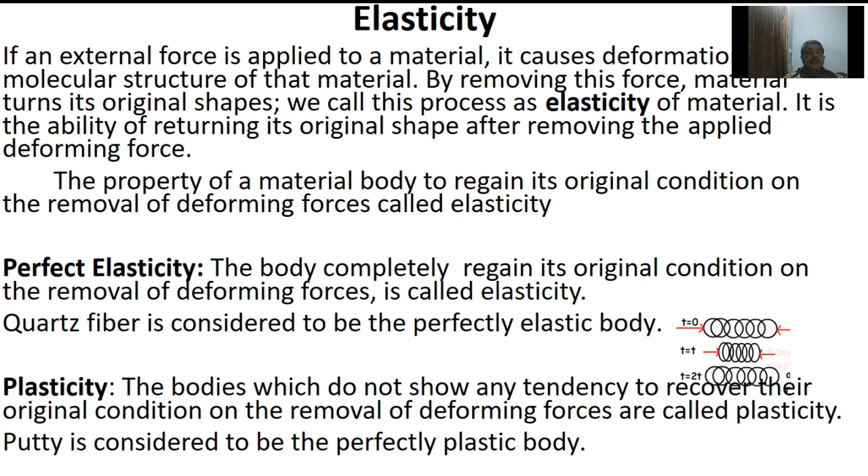Here elasticity measures how difficult it is to stretch. In our day-to-day life, if anybody asks which is more elastic, a rubber or a steel, our answer is rubber. But physics defines elasticity as resistance to change. The greater the resistance to change, the greater is the elasticity of the material, and the faster it comes back to original shape after the deforming force is removed. In the physics sense, steel is more elastic than rubber.

Next, we'll move on to stress. A body is in equilibrium under the influence of intermolecular force, but when deforming forces are applied to it, there is relative displacement of particles, and that gives rise to an internal force of reaction which tends to oppose and balance the deforming force. If this opposite force is uniform, it is a distributed force like fluid pressure and is measured in the same manner as force per unit area.

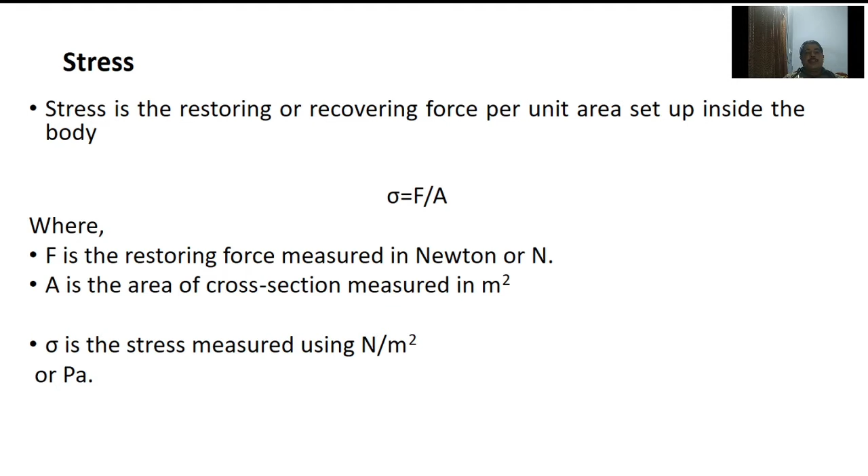This restoring force per unit area set up inside the body is what we call stress. It is given by sigma = F/A, where F is the restoring force and A is the area of cross section. SI unit of stress is Newton per meter square or Pascal.

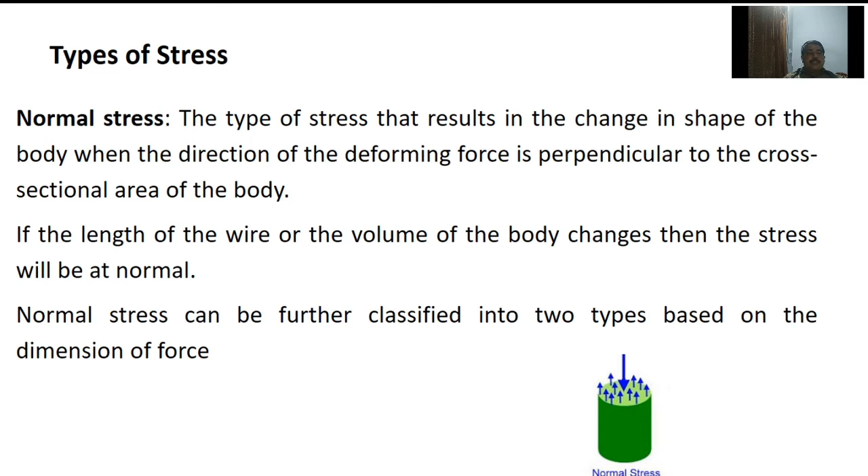Next, we'll move on to types of stress. First one is the normal stress. When force acts perpendicular to the surface of an object, it is called normal stress. When normal stress acts on the body, there is a change in the length or volume of the body. Normal stress can be further classified into two types based on the dimension of force: longitudinal stress and bulk stress.

We know that when normal stress is applied on the body, there is a change in length or volume of the body. If there is a change in length of the body, it is called longitudinal stress. When the deforming force acts in all dimensions resulting in a change in volume, it is called bulk stress.

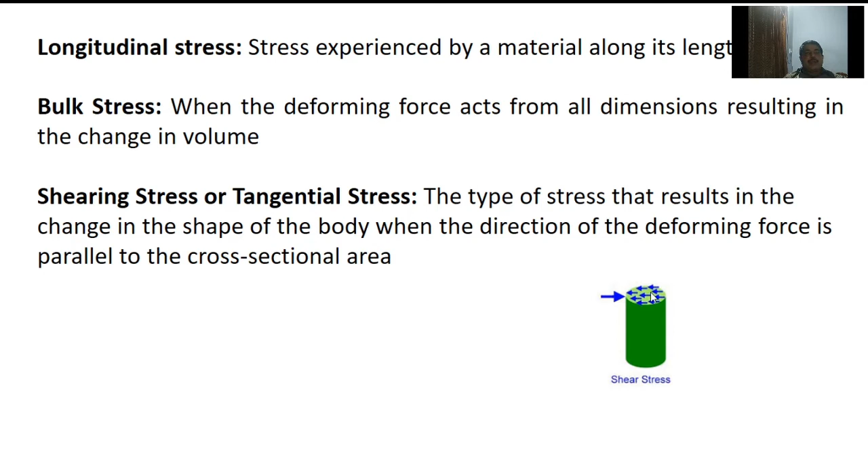Next, we will move on to shearing stress or tangential stress. In this type of stress, the force acts parallel to the surface of an object. When tangential stress acts on the body, there is a change in the shape of the body.

Next, we'll move on to strain. We know that when a deforming force is applied on a body, there is a change in length, volume, or shape of the body. Then we say that the body is under strain.

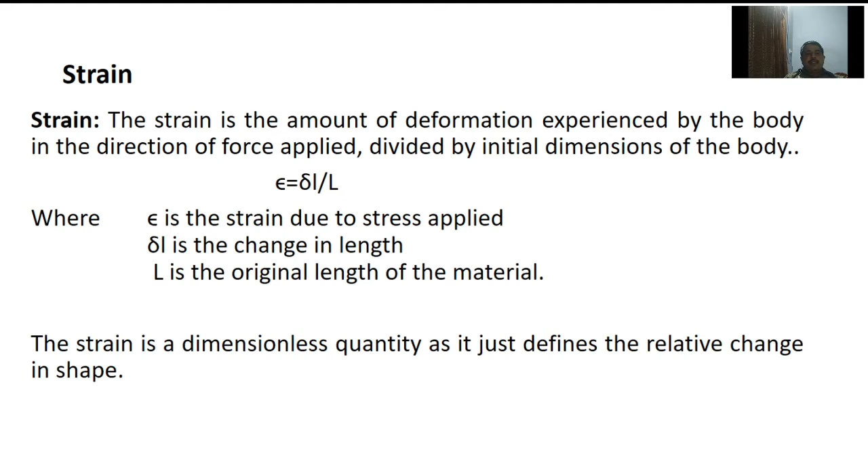Strain is the amount of deformation experienced by the body in the direction of the force applied divided by the initial dimension of the body. That is, strain is equal to change in dimension by original dimension, and it is given by ε = ΔL/L, where ΔL is change in length and capital L is the original length of the material. Strain is a dimensionless quantity as it just defines the relative change in shape.

Next, we will move on to Hooke's law. Hooke's law is a fundamental law of elasticity, proposed by Robert Hooke in the year 1679. It states that within the elastic limit, stress is directly proportional to strain. Therefore, stress is equal to E into strain, or E is equal to stress by strain, where E is the proportionality constant, and it is called the modulus of elasticity. The unit and dimension of the modulus of elasticity are the same as that of stress.

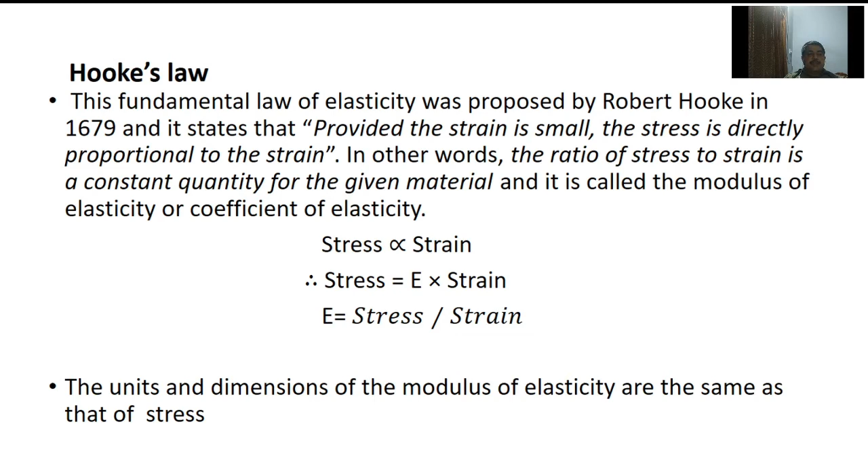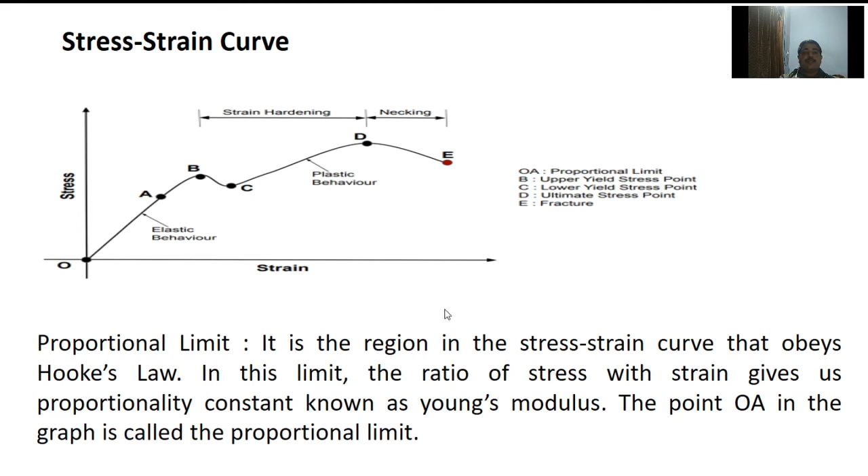Next, we'll move on to the elastic limit. The elastic limit is a point on the graph up to which the material returns to its original position, or it is the maximum stress up to which the material shows perfect elastic behavior. That is called the elastic limit.

Here BC is called the yield point. It is the point at which the material starts to deform plastically. After the yield point is passed, permanent plastic deformation occurs. There are two yield points: the upper yield point, at point B, and the lower yield point, at point C. Now let us see what the upper yield point is.

Beyond the elastic limit, the material exhibits plastic properties. The upper yield point is the point where maximum stress is required to initiate plastic deformation inside the material. And C is the lower yield point. After point C, the material length increases with a very small increase in load. So the lower yield point is the point where minimum stress is required to exhibit the plastic behavior of a material.